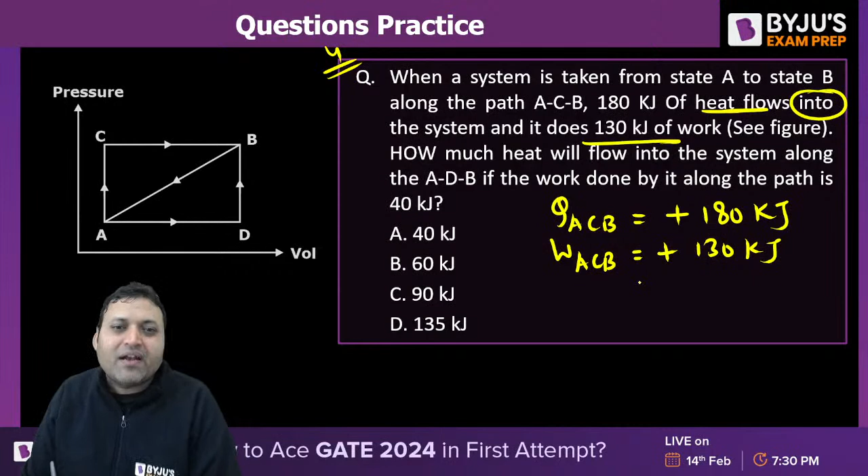Signs are important, sign convention is very, very important. How much heat will flow into the system along the path ADB, QADB, if the work done along the path is 40 kilojoule.

WADB is, what is the answer? WADB is given as plus 40 kilojoule. Yes, what is the answer? Everyone, please give it a try and let me know.

If we apply the first law of thermodynamics, we can say Q is equal to delta U plus W. Can you solve it? So Q minus W, because delta U will be same - delta U for both processes, the initial point is A and the final point is B. Because the initial and final points are same, internal energy is a property, or internal energy is a point function.

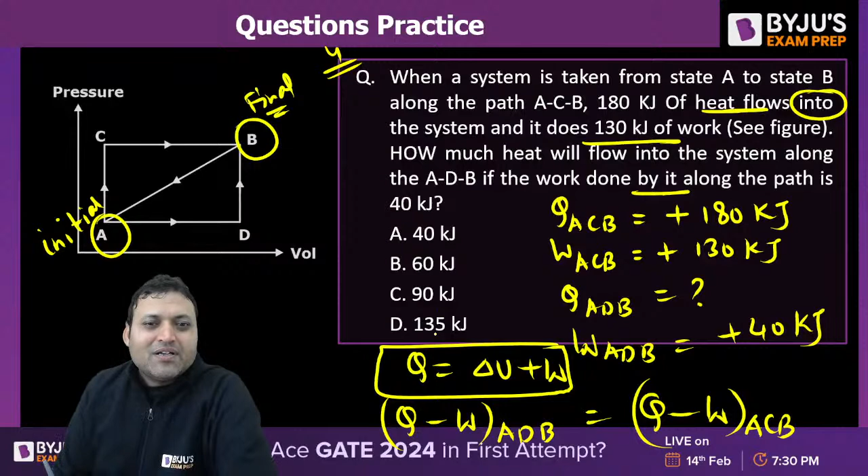So Q minus W for ADB should be equal to Q minus W for ACB. So can you find out QADB? What is the answer? If the question asks you to find the change in internal energy, that is also possible. Option C is the right answer, 90 kilojoule.

Shall I solve it? So QADB minus WADB, that is minus 40, is equal to QACB, that is 180, minus WACB, that is 130. So QADB will be equal to 50 plus 40 kilojoule, that is 90 kilojoule, right? It is 90 kilojoule. Option C is the correct answer.

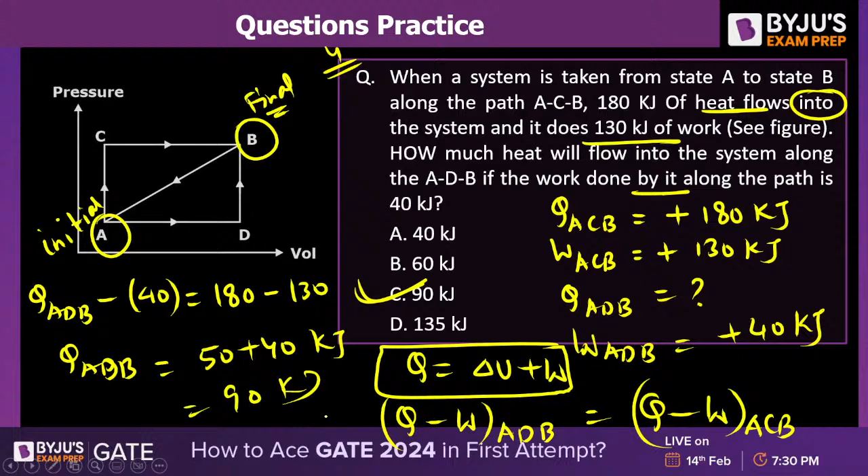Read the question and try to find out the answer. You should always read the question very carefully, because you might commit a silly mistake in a hurry.

A gas expands from pressure P1 to pressure P2, so there is an expansion of the gas. If we draw the process on a PV diagram, then it is an expansion process. P2 is P1 by 10. Let me call this P1 and this P2, which equals P1 by 10. So the gas is expanding.

If the process of expansion is isothermal, the volume at the end of expansion is 0.55 meter cube. If the process of expansion is adiabatic, the volume at the end of expansion will be close to what? So this is point 1. Can you draw the curve for isothermal?

So the slope dP by dV for isothermal is less than the slope for adiabatic. The slope of the isothermal curve on the PV diagram will be less than the slope of the adiabatic curve, isn't it? So the isothermal process will be something like this, T equals constant, and the adiabatic process will be something like this.

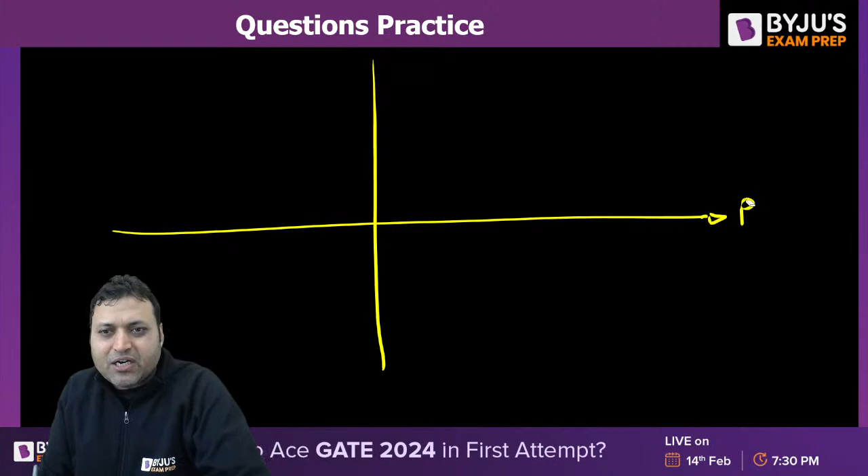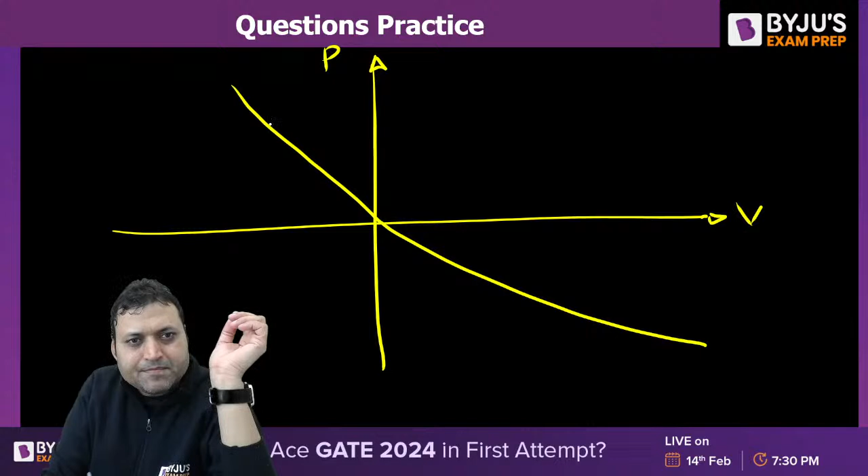Simple question. So if we draw the curve, pressure versus volume, this is constant pressure, this is constant volume line. This is volume, this is the pressure. So the curves will be something like this, this is constant temperature, isothermal, and for isothermal PV to the power n equals constant.

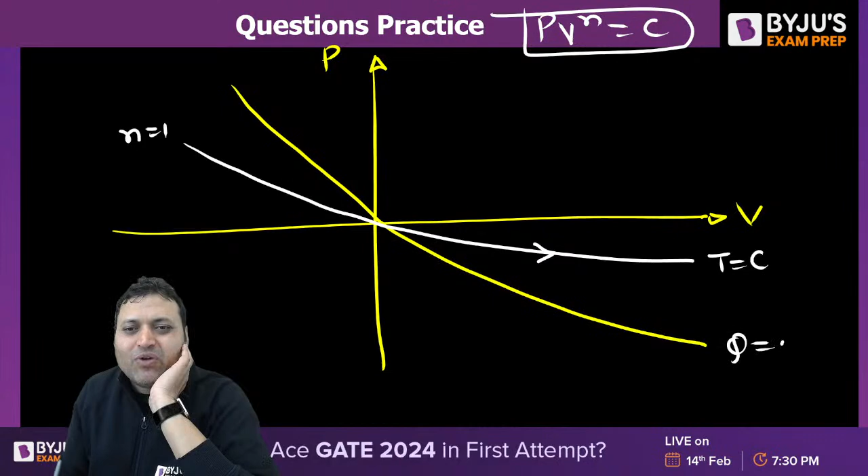For isothermal, n will equal 1, and this is adiabatic, Q is equal to 0. For adiabatic process, n equals gamma, that is Cp by Cv. And this is the constant volume process, n equals 0. For constant volume, n will equal 0. And for constant pressure, n equals infinite.

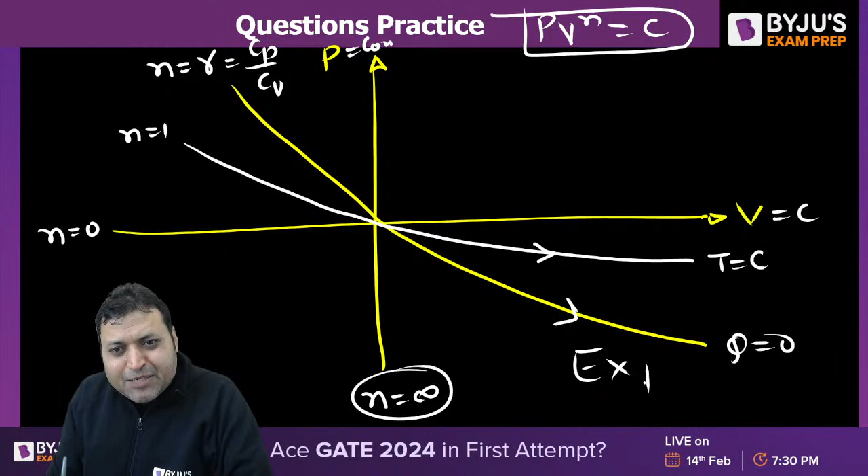This represents expansion, and this is the compression region. This will be the compression and this will be the expansion. So we can find it out.

For constant volume, n equals 0. For adiabatic, n equals Cp by Cv, so A2, C cannot be true. Isothermal, n equals 1, so B3, D is ruled out. Then constant pressure, n equals infinite, so C1, constant pressure.

I made a mistake there. For constant pressure, n will equal 0, and for constant volume, n will be infinite. This is actually the constant volume process. The vertical line is the constant volume process, and the horizontal line is the constant pressure process. N equals infinite.

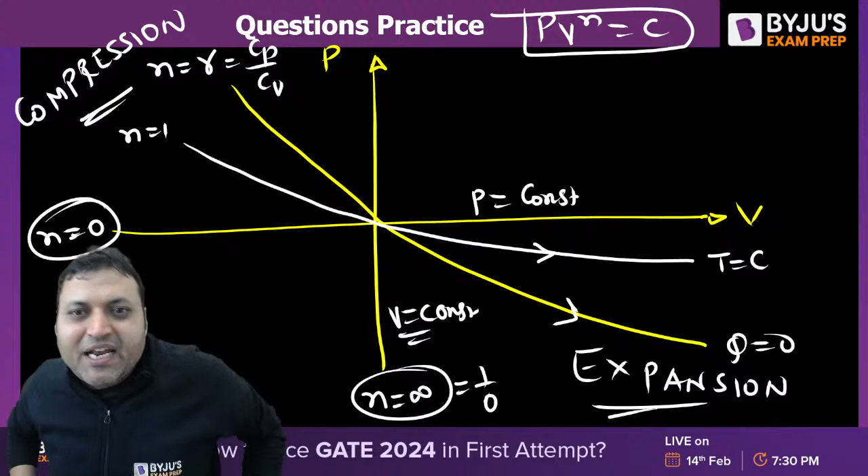Agar PV n ki value 0 put kar de toh v to the power 0 will be equal to 1. What is the value of v to the power 0, that is equal to 1? Implies pressure is constant. So for constant pressure process, n will be 0.

For constant pressure process, n will be equal to 0. And...

PV to the power n is equal to constant. If we want constant volume process, then what we can do? We can take the power 1 by n here, 1 by n. So p to the power 1 by n into v is equal to constant to the power 1 by n.

Is again another constant. So we want 1 by n to be 0 for constant volume process. So 1 by n will be equal to 0.

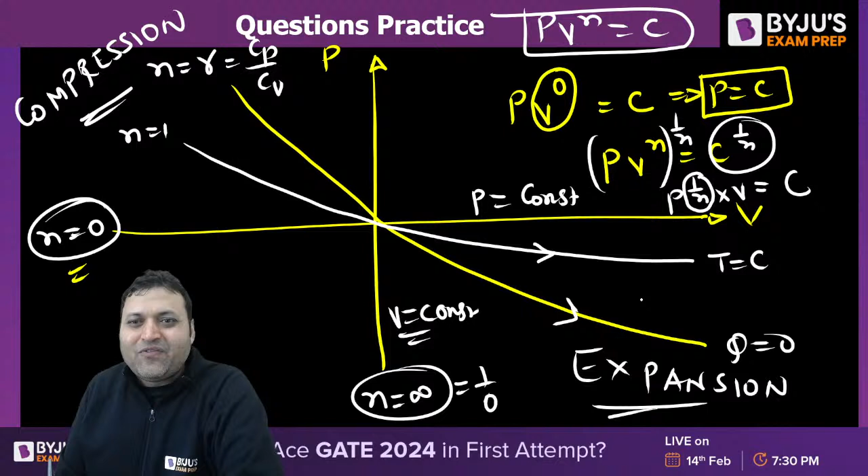So we can say n will be equal to, if 1 by n is equal to 0, then it will become constant volume process. For constant volume process, n will be infinite, isn't it?

Isothermal ke liye, isothermal process is PV is equal to constant, that is isothermal process. For isothermal process, n is equal to 1. And for adiabatic, PV to the power gamma is constant. So n will be equal to gamma, that is Cp by Cv. Right, Krishna? Clear?

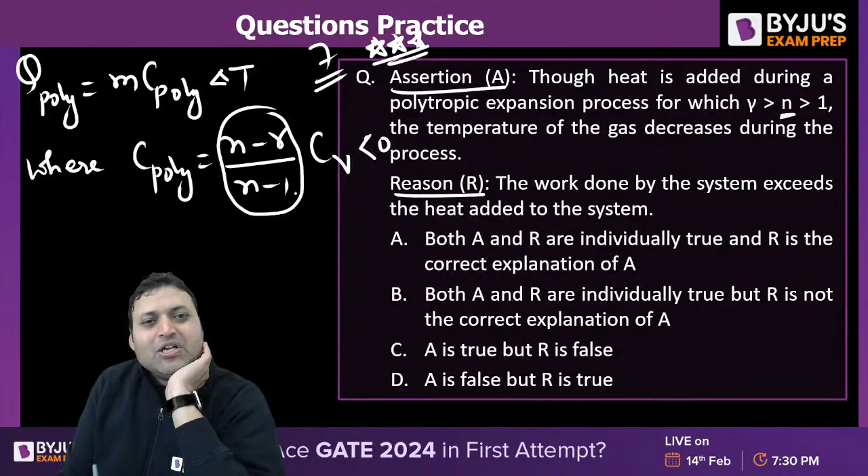So if you see, this is less than 0, this is negative because n is less than gamma. So n minus gamma will be negative. So this value will be negative. So if Q is positive, heat is added, then delta T will be negative.

So the temperature will decrease. Heat addition will give rise to decrease in temperature, and heat rejection will give rise to increase in temperature. For a polytropic process, heat addition will give rise to decrease in temperature, and heat rejection will give rise to

increase in temperature. So the temperature of the gas will decrease during the process, heat addition. So assertion is correct.

And if we talk about the reason, the work done by the system exceeds the heat added to the system. If we talk about the work done, what is the work done in a polytropic process?

Or we can say Q for polytropic process is equal to M into C poly into delta T, which is equal to gamma minus n upon gamma minus 1 into W for polytropic process.

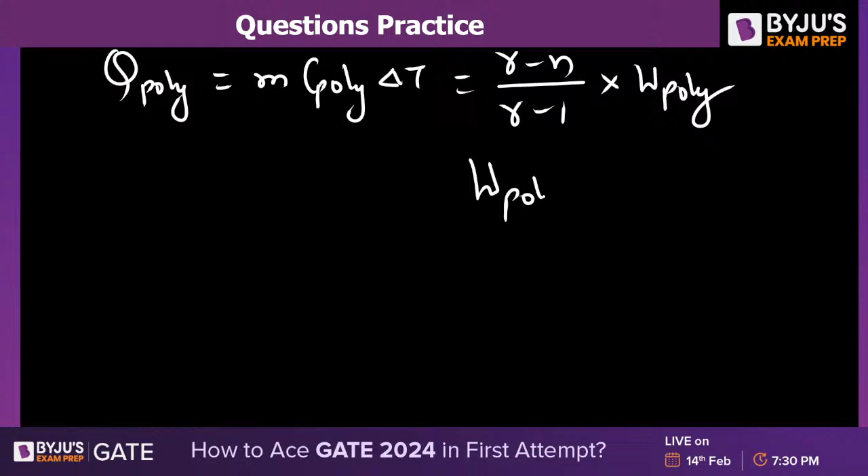And where W for polytropic process will be equal to P1 V1 minus P2 V2. It will be P1 V1 minus P2 V2 upon n minus 1. Right?

So this is positive value, this is positive. And that is less than, this is less than 1.

That is less than 1. So if this is less than 1, then Q poly will be less than W poly.

The work done by the system, reason, sorry. So work done.

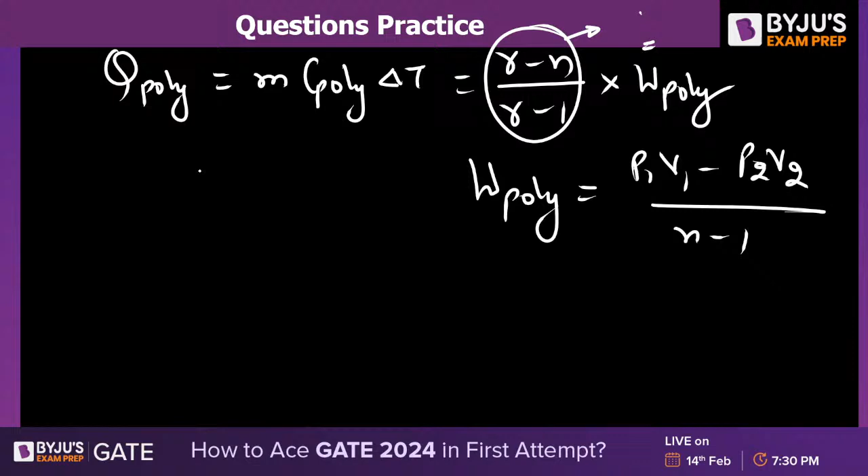Because gamma is greater than n is greater than 1, the work done by the system exceeds the heat added to the system.

Yes, work done is greater than, because Q is equal to W plus delta U, because the temperature is decreasing, so this is decreasing.

Delta U will be decreasing. So that is why work done is greater than Q, heat supply. Yes, so option A is the correct answer.

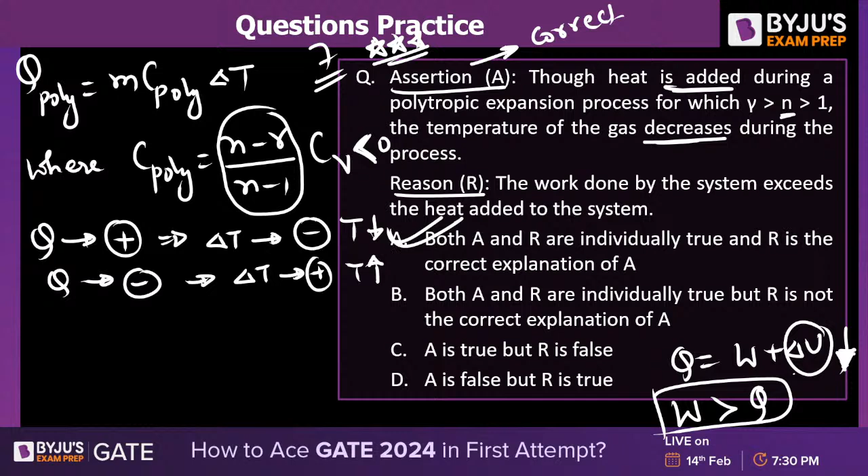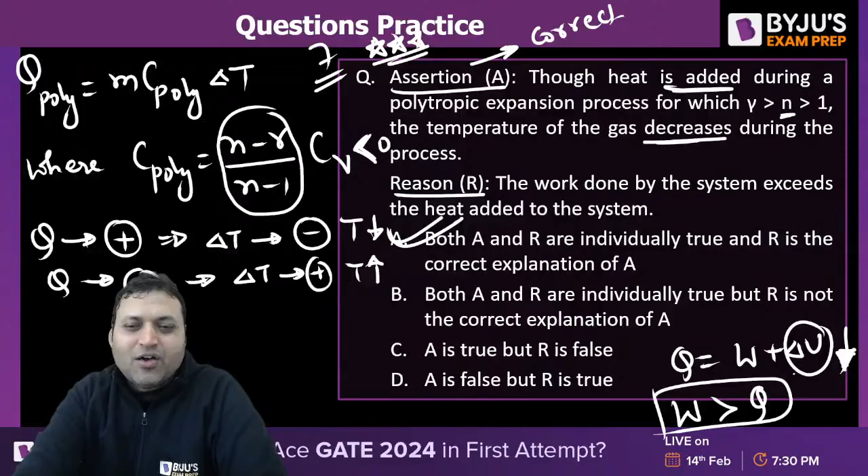Assertion and reason are individually true, and the reason is the correct explanation for the assertion. That is why during the heat addition, the temperature decreases. So option A is the right answer, option A will be the correct answer.

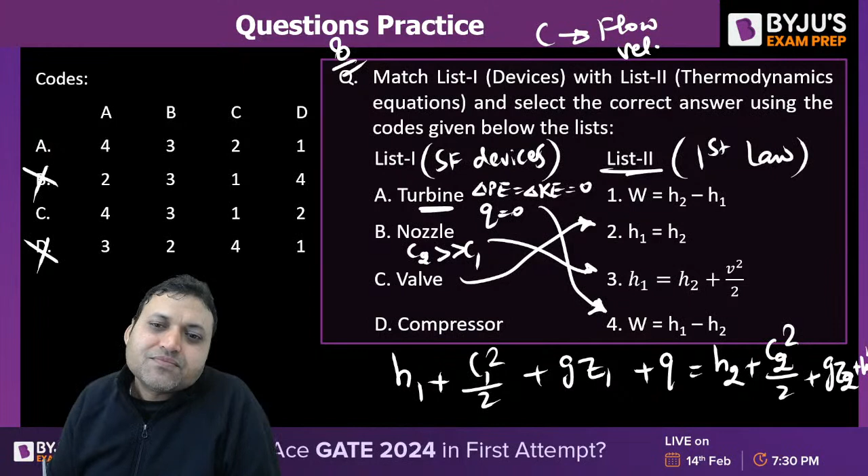And valve: isenthalpic, throttling valve is isenthalpic. Throttle valve, isenthalpic, there is no change in potential energy, no change in kinetic energy, no heat flow, no work done. So for a valve, H1 is equal to H2, C2, C2. Option A is the correct answer.

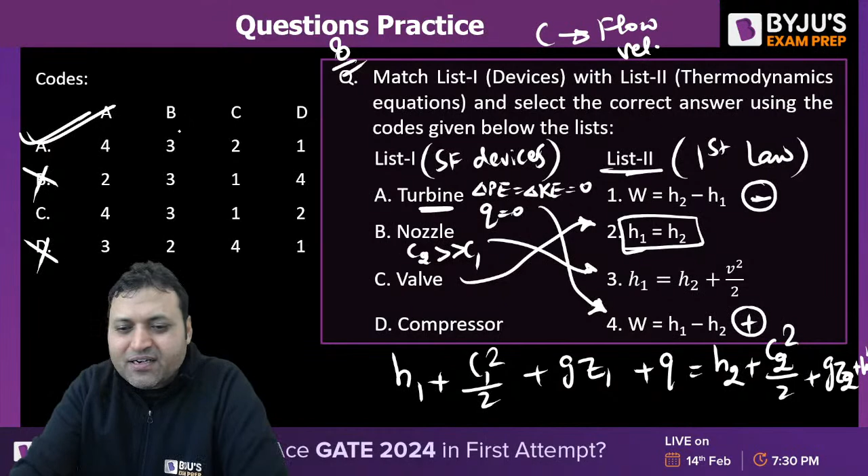And D, compressor is a work consuming device, so it will be H1 minus H2. Work done for a compressor is negative, work done for a turbine will be positive. Sorry, this is for turbine and this is for compressor: 1 is for compressor, H2 minus H1, and 4 is for turbine. Option A is the correct answer, right? Option A.

The next one, question number 9. Question number 9 is this. Can you solve this one? Question number 9 on the screen.

It is a PV curve. The net work done for a closed system undergoing a cycle shown in the figure, pressure versus volume diagram, is what is asked. What is the net work done for the cycle A, B, C, D? Can you solve it? This is question number 9, we are having 20 questions, then Sonu sir will bring another 20 questions.

For a cycle, the work done is the area under the PV curve or area enclosed by the cycle. Net work done will be the area enclosed by the cycle. Can you find out the area? Pressure is in bar, volume is in meter cube, so bar is 100 kilopascal.

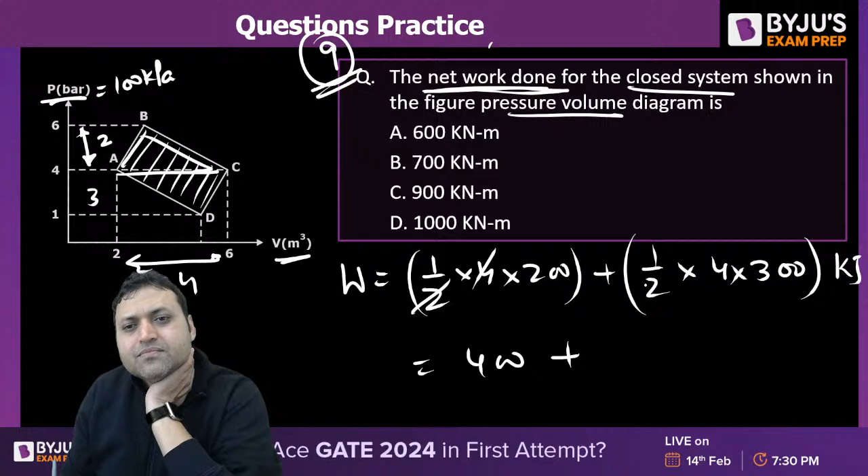So if you see, the height of triangle ABC is 2 and the height of triangle ACD is 3. So work done is equal to half into base, this base is 4 meter cube, into height that is 200 kilopascal, plus half into base, again 4, into 300 kilopascal. This is in kilojoule or kilonewton meter. Do the calculation, that is equal to 400 plus 600, that is 1000 kilonewton meter.

Option D is the answer, 1000, yes it is option D.

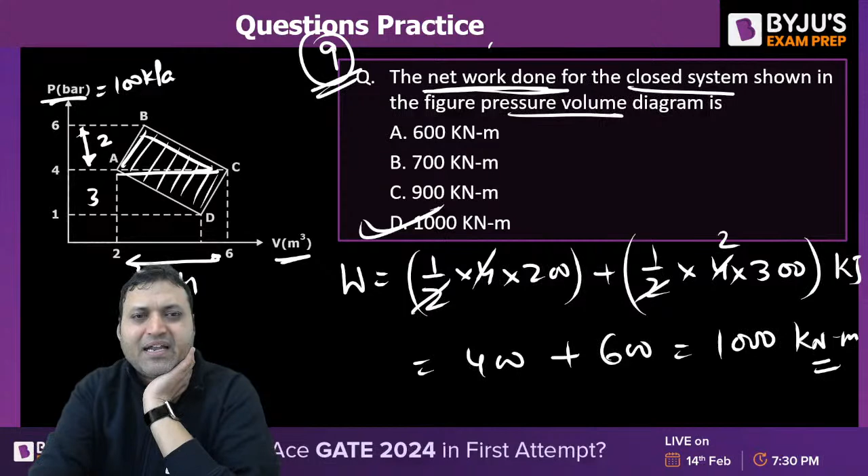The next one, question number 10. There is a volume versus temperature curve given for the cycle. You need to represent this curve on a PV diagram, represent this cycle on the PV diagram.

If you see the AB process, A to B, volume is directly proportional to temperature, it is a straight line. So AB is a constant pressure process. This cannot be correct if it's shown as constant volume, AB is constant pressure process. If volume is directly proportional to temperature for an ideal gas, then it means it is an isobaric process. Only option possible is D.

AB is constant pressure, heat addition, so the temperature is rising. Heat addition at constant pressure is constant pressure expansion, so there is an expansion.

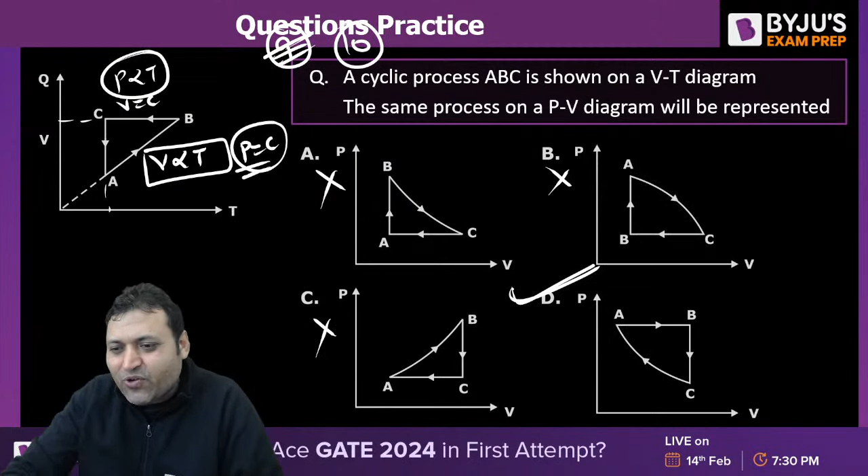B to C is a constant volume process, so pressure is directly proportional to temperature. B to C is constant volume process. And C to A is constant temperature or isothermal process, C to A is isothermal. D is the answer for this, option D is the correct answer.

You should be able to represent a cycle on one curve into another curve. The next question, question number 11.

The next one, question number 11. If integration of PdV and integration of VdP for a thermodynamic system of an ideal gas on evaluation give the same quantity during a process, then the process undergone by the system is?

So for which curve? For an isothermal process, closed system work will be equal to open system work. Integration of PdV will be same as integration of VdP, or minus VdP. So closed system work and open system work will be the same.

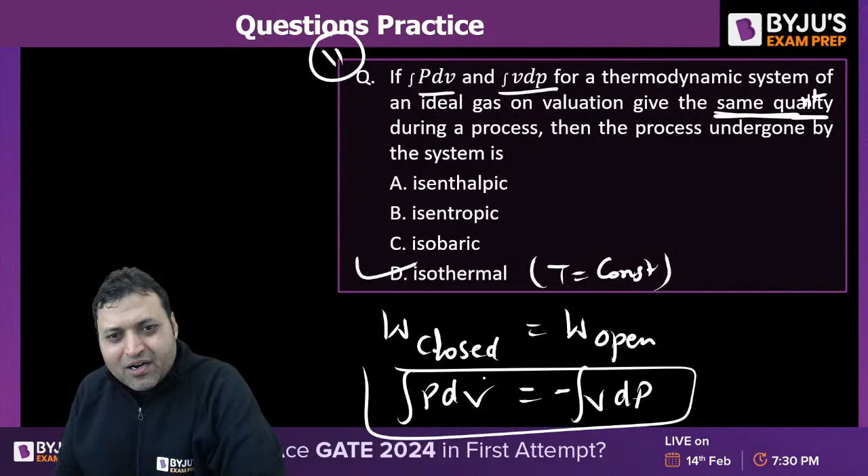First law of thermodynamics is valid for the next one. First law of thermodynamics is valid for.

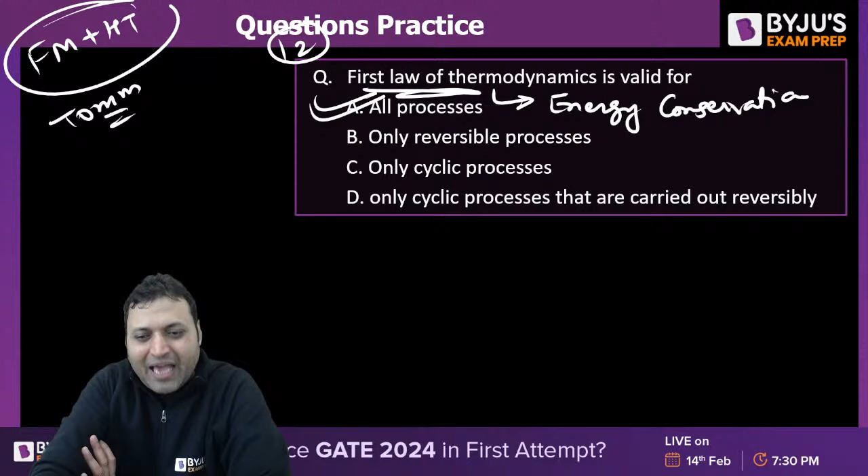First law of thermodynamics is nothing but energy conservation. It is energy conservation, so it is valid for all types of processes, reversible as well as irreversible. It is valid for a process also, and it is valid for a cycle also, because it is the energy conservation which is a universal law.

The next question, question number 13. Beautiful question. An ideal gas is taken through 3 processes, as a result of which the final state is identical with the initial state. It means it makes a thermodynamic cycle. The nature of the processes, work done and heat transfer during the processes are as follows.

1 to 2 is a constant volume process, volume is constant, with a heat input of 50 kilojoule. Q is equal to 50 kilojoule, heat is added. And if it is constant volume, work will be equal to 0, W equals 0, and Q is equal to delta U.

Then 2 to 3 process is isothermal, temperature is constant. Isothermal expansion, and the work done by the system is 500 kilojoule. Here delta U will be equal to 0. So W is equal to Q, work done is equal to heat addition.

And 3 to 1 process is constant pressure, pressure is constant for 3 to 1. And the work done on the system, W is equal to minus 200 kilojoule. Then what will be the heat transfer and the change in internal energy during the process 3 to 1? So what is Q for 3 to 1 and change in internal energy from 3 to 1? What is the answer?

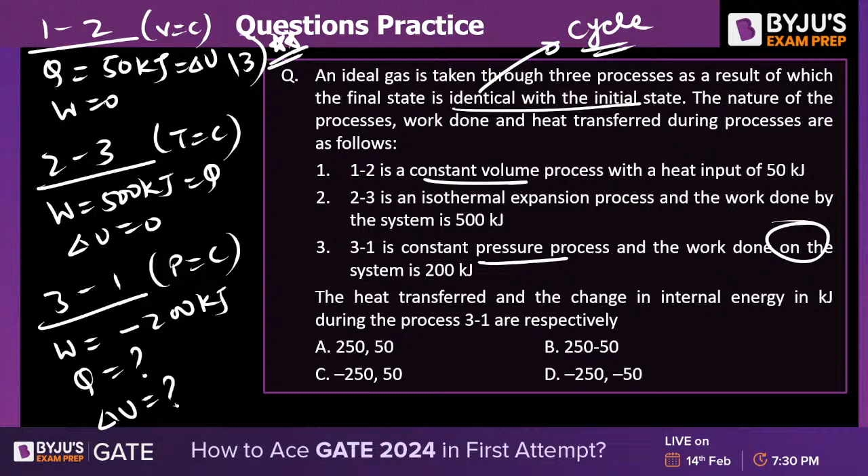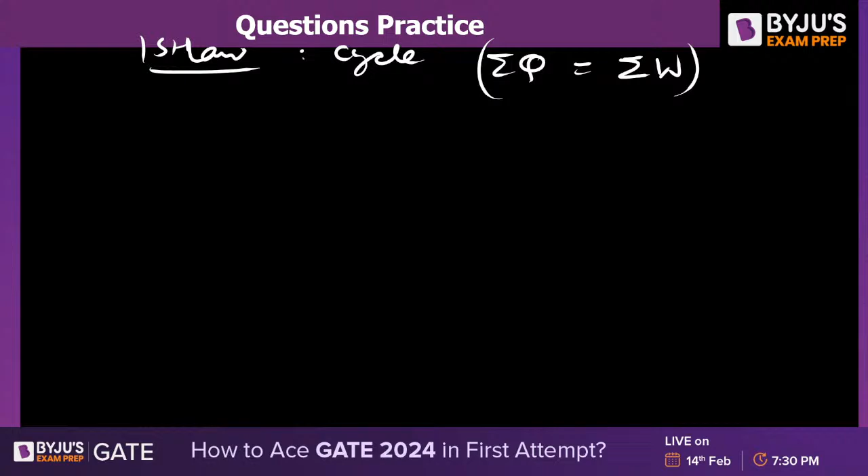So for a thermodynamic cycle, net heat transfer is equal to net work transfer - first law for a cycle. If we apply first law for a cycle, sigma Q is equal to sigma W. From here we can find out W. Can you find out W?

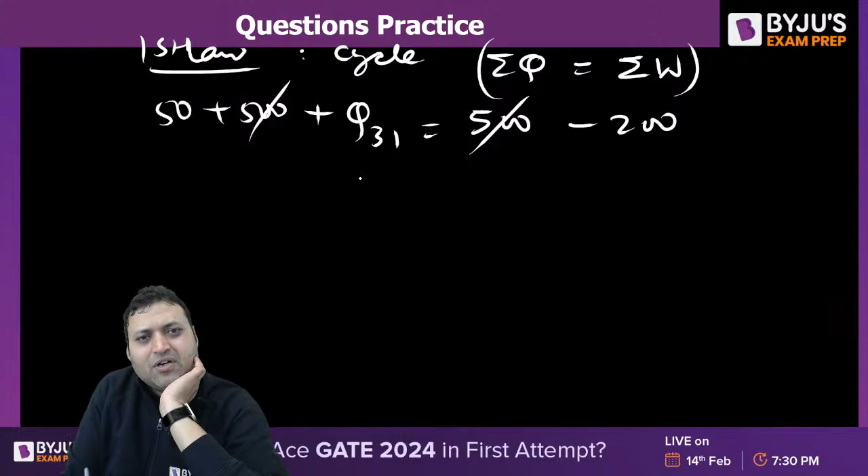50 plus 500 plus Q for 3 to 1 is equal to 0 plus 500 minus 200. This 500 gets cancelled out. So Q for 3 to 1 is equal to minus 250. Once you find Q for 3 to 1, you can find delta U. So Q for 3 to 1 is equal to delta U for 3 to 1 plus W for 3 to 1. So minus 250 is equal to delta U plus W 3 to 1 which is minus 200. So delta U will be equal to minus 250 plus 200, that is equal to minus 50.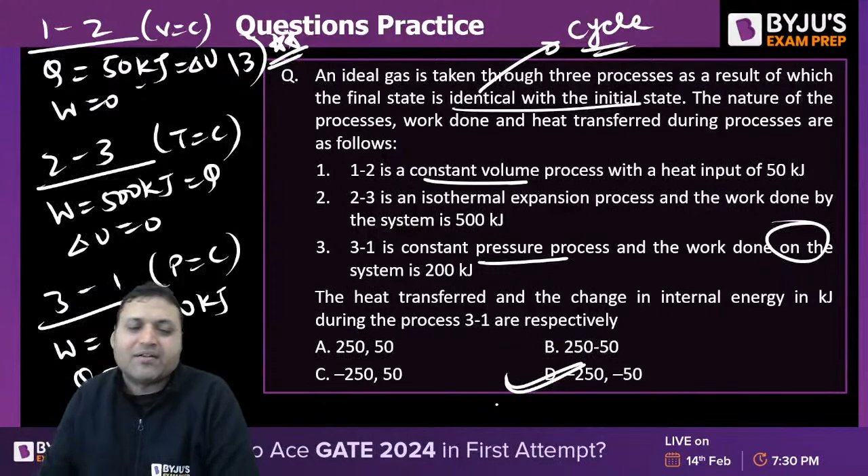First law of thermodynamics: so Q will be minus 250 and delta U will be minus 50. Minus 250 and minus 50. Signs are very, very important - take care of the sign convention, otherwise you might end up committing a mistake.

The next one, question number 14. Question number 14 on the screen. Find out the answer for question number 14.

A balloon containing an ideal gas is initially kept in an evacuated and insulated room. Q is equal to 0, thermally insulated, and evacuated means free expansion. It is vacuum - vacuum does not offer any resistance. It is the free expansion, so W is equal to 0.

The balloon ruptures and the gas fills the entire room. Which one of the following statements is true at the end of the above process? So it is the free expansion against vacuum, which does not offer any resistance, so work done will be equal to 0. Q is equal to 0, and from the first law of thermodynamics, delta U will be equal to 0. And because it is an ideal gas, U and H are a function of temperature only.

For an ideal gas, U and H are functions of temperature only. So if delta U is equal to 0, it means the temperature is constant. Then delta H will also be equal to 0. Both internal energy and enthalpy change will be 0, meaning both will remain constant. There is no change in internal energy and no change in enthalpy of the system.

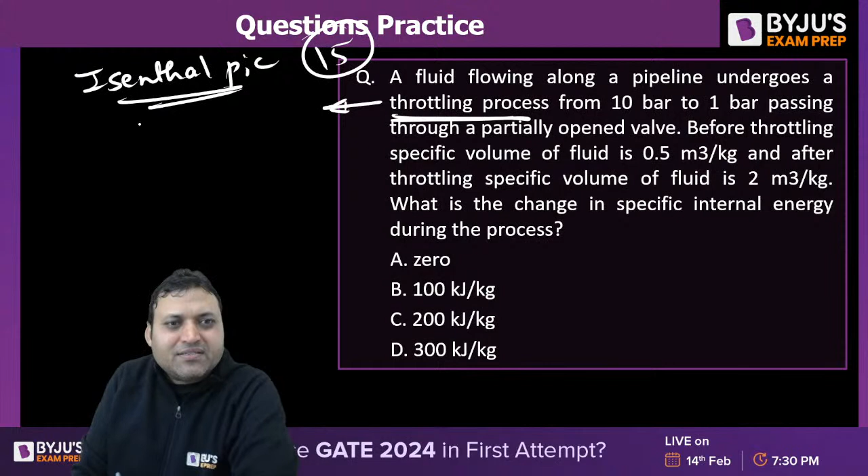Question number 15. A fluid flowing along a pipeline undergoes a throttling process. What is throttling? Flow through a restricted passage, and throttling is isenthalpic, so H1 is equal to H2. Enthalpy remains constant. It is expanding, flowing from 10 bar to 1 bar, passing through a partially opened valve. Before throttling, specific volume is 0.5 meter cube per kg, and after throttling, specific volume is 2 meter cube per kg. What is the change in specific internal energy?

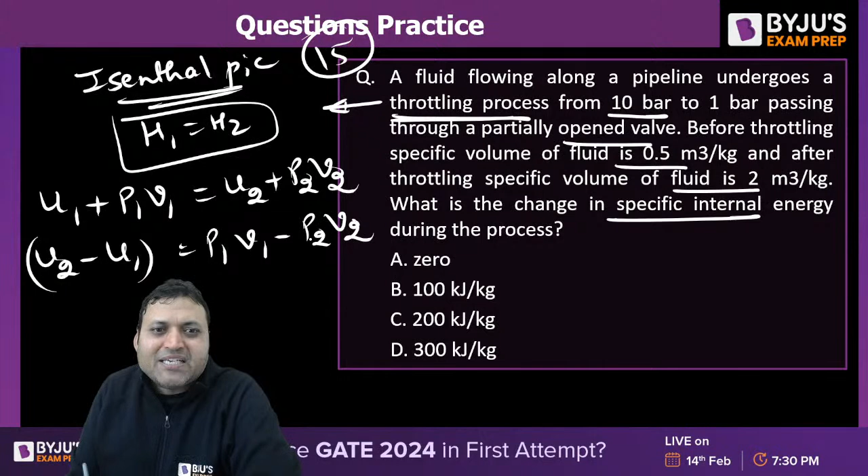So U1 plus P1V1 is equal to U2 plus P2V2, where P is pressure and V is specific volume. So U2 minus U1 is equal to P1V1 minus P2V2. We need to find the value in kilojoule per kg. P1 is 10 bar, V1 is 0.5, minus P2 which is 1 bar, that is 100 kilopascal, into V2, that is 2. That will give you the answer.

500 minus 200, that is 300 kilojoule per kg. Right, 300 kilojoule per kg. Option D is the correct answer.

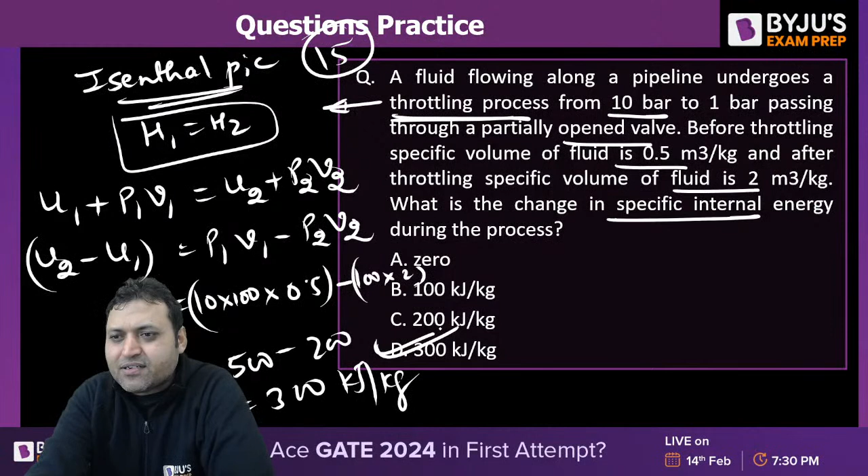Question number 16. An engine, heat engine, reversibly receives 1200 joule of heat at 900 Kelvin. It is receiving 1200 joule of heat. After rejecting heat to the ambient at 300 Kelvin, it develops 600 joule of work. Work produced is equal to 600, so Q2 will be equal to 600.

From the second law of thermodynamics, the irreversibility in joule is equal to T naught, the ambient temperature, into delta S for the universe. There is no change in entropy for the engine itself, so universe means source and sink, treated as an isolated system. So T naught is 300. We can say delta S for the source plus delta S for the sink.

300 Kelvin multiplied by: heat is rejected from the source, so entropy will decrease, that is minus Q1 by T1. Heat is added to the sink, so entropy will increase, that is plus Q2 by T2. Put the values and you get: 300 into minus 1200 divided by 900, plus 600 by 300.

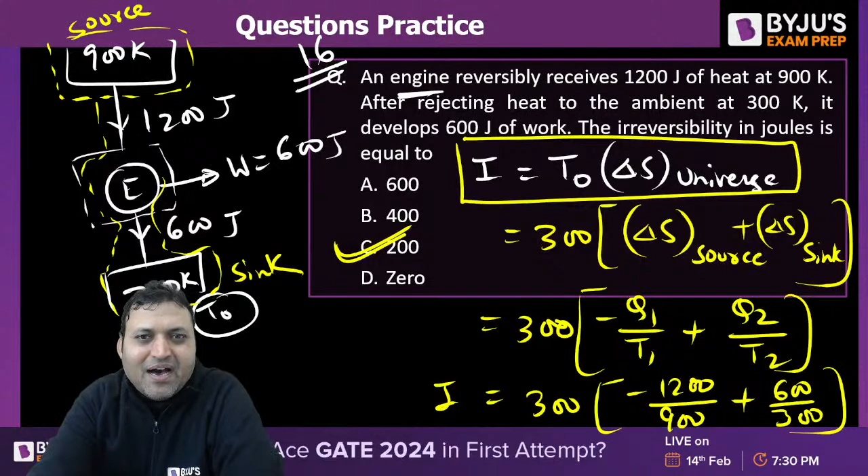What is the answer for question number 16? Irreversibility is equal to this formula, which you are supposed to remember. So the answer to this question is option C.

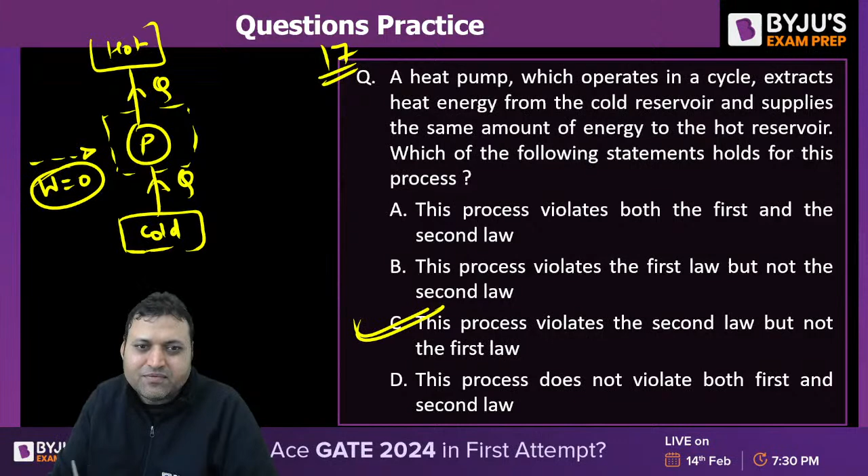According to the first law of thermodynamics, energy in is equal to energy out, so it does not violate this law. But it violates the Clausius statement of the second law of thermodynamics, because according to Clausius, heat cannot flow from a low temperature reservoir to a high temperature reservoir without any external work. So if work done is zero, the process cannot be possible. This process violates the second law but not the first law. Option C is the correct answer.

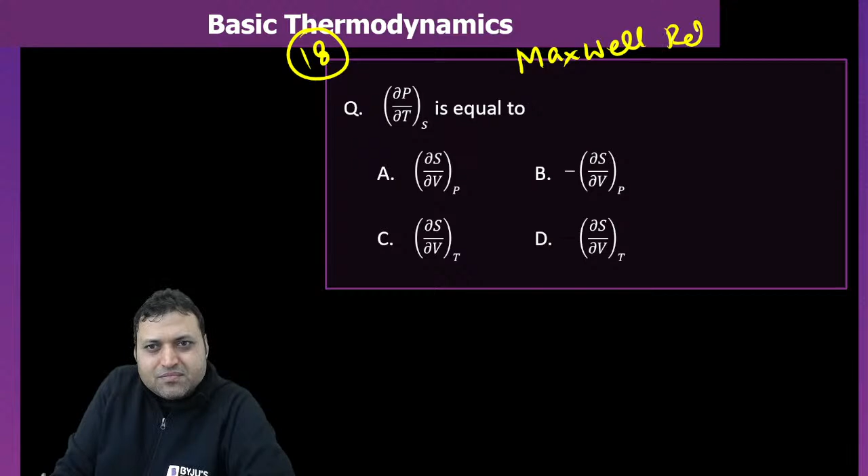Question number 18. From the Maxwell relation, you can develop the relation using the thermodynamic square. Del P by del T at constant entropy is equal to which one of the following options? Using the thermodynamic square, you can memorize this. I hope you know the thermodynamic square.

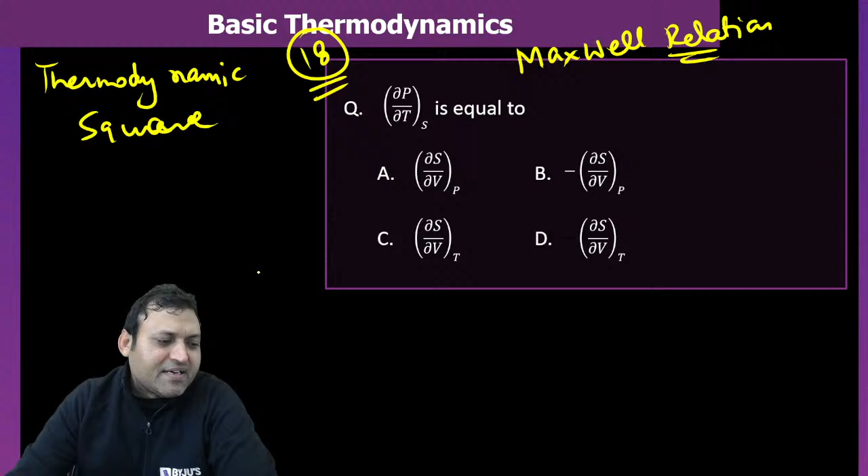Good professors have studied under very fine teachers. So del P by del T, this is equal to, at constant... del P by del T. It must have been.

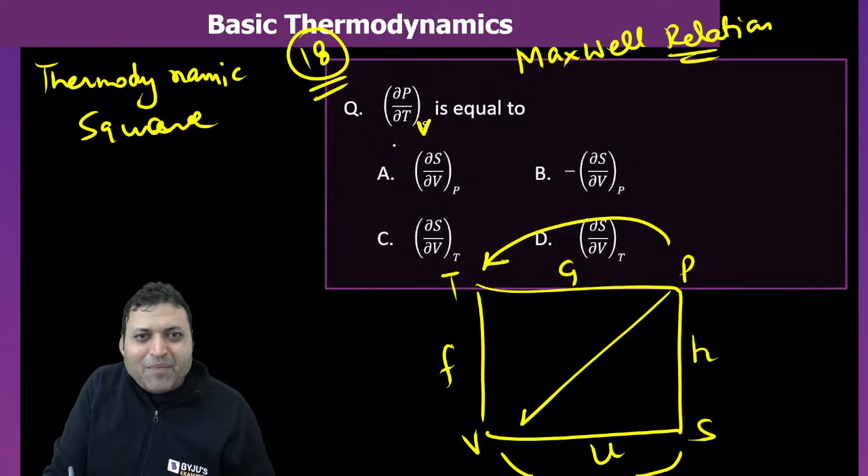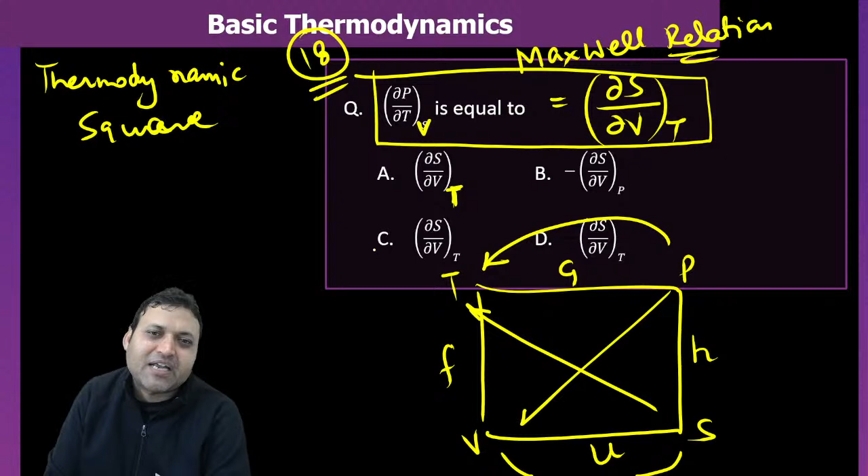It should have been constant volume, then it will be del S by del V at constant pressure. There was a slight mistake here. C and D are same. Del P by del T at constant volume should be equal to del S by del V at constant temperature. It should have been the temperature. And when S and P are coming together, we should put negative signs. So there was a slight mistake in the options, but del P by del T at constant volume should be equal to del S by del V at constant temperature. Option A would have been correct.

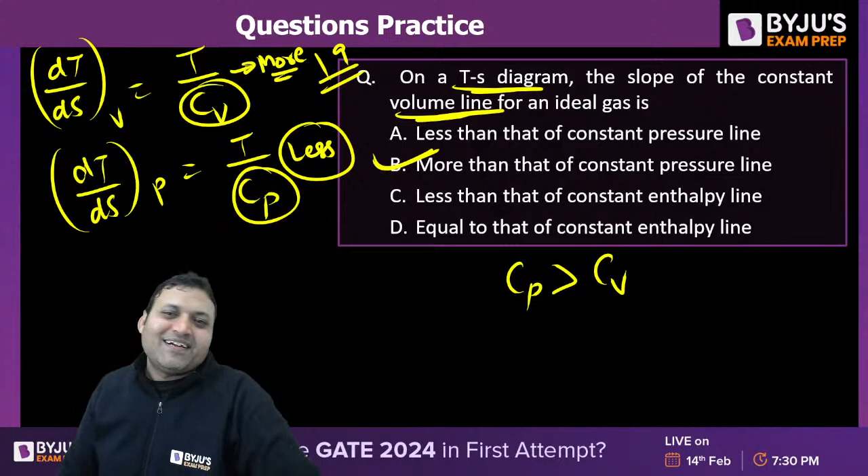Next one, question number 19. On a TS curve, the slope of constant volume line for an ideal gas is. So for a constant volume line, slope dt by ds is equal to T by Cv. dt by ds for constant pressure is equal to T by Cp. And Cp is greater than Cv, so constant volume line will have more slope than the constant pressure line, because Cv is less. Isn't it option B? Constant volume line will have more slope. It is B.

And this question is your assignment. This is your assignment question.

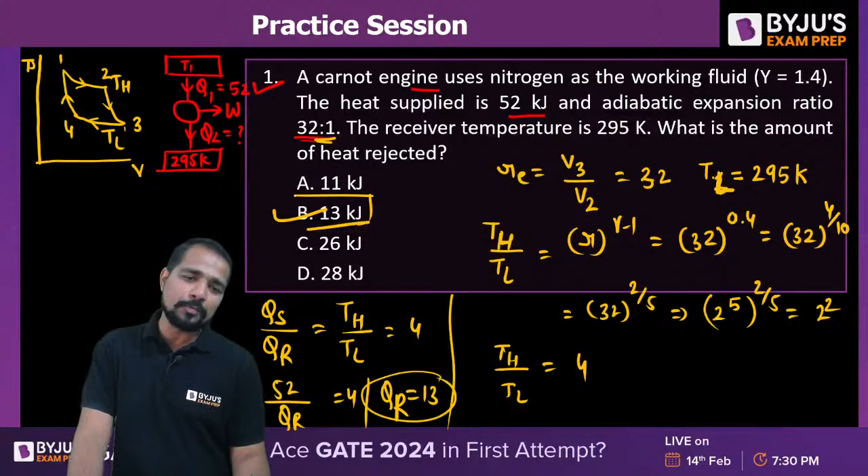Again, it is the example of the Carnot engine. You may ask why it is the Carnot engine. This is T1, this one is the heat supply, and this is the heat engine. And again there is the heat rejection, and this will be T lower, that will be the value of T2. Work will be somewhere like this.

You must ask, sir, nowhere is it written that it will be a Carnot cycle, so how can we say that? Sir, it is written clearly that you want to reject the least amount of heat, meaning you want the maximum amount of work output, and that is only possible when it is the problem of a reversible heat engine or the Carnot cycle.

So can we write from here that efficiency of the Carnot engine will be equal to 1 minus T2 divided by T1? It is also equal to 1 minus Q2 divided by Q1. So in this case, T2 divided by T1 will be equal to Q2 divided by Q1. T2, how much is given, my dear? T1 is 606. What will be the value?

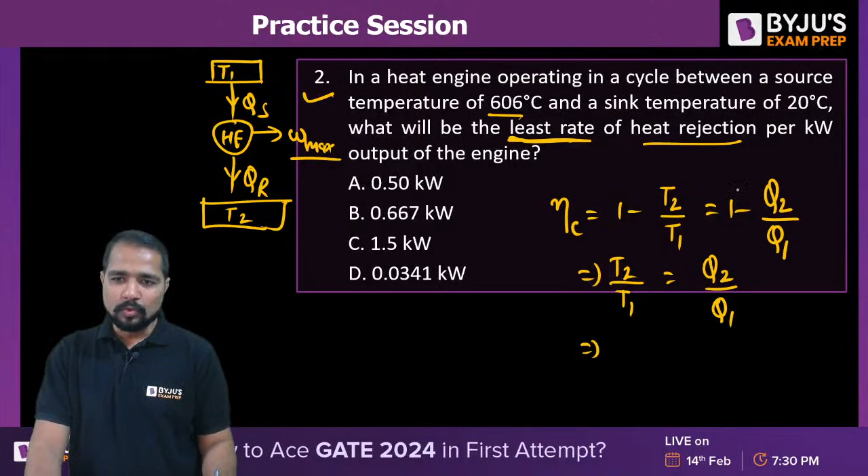T2, 20, that is 293. And what is it? That will be equal to 879. Absolutely right. And this is Q3 or Q2, and that is Q1. Are we not getting 1 by 3? 1 by 3, so what is the, yes, so in this case we can say that Q2.

Q2 will be equal to Q1 by 3, right? So for 1 kilowatt, if we write from here, then we can write W will be equal to Q1 minus of Q2. And W, what exactly I want? 1 kilowatt. So what is the value of Q2 we need to find?

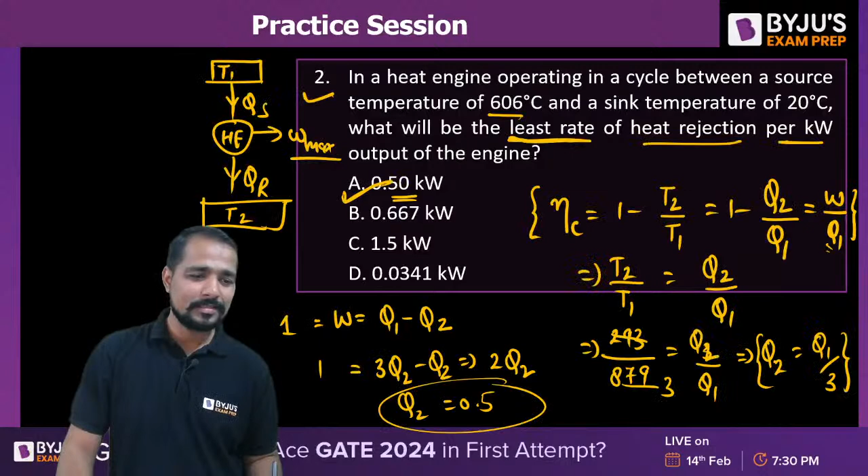What's happening to the screen? Okay, now it's fine. Yes, so the next question is this one.

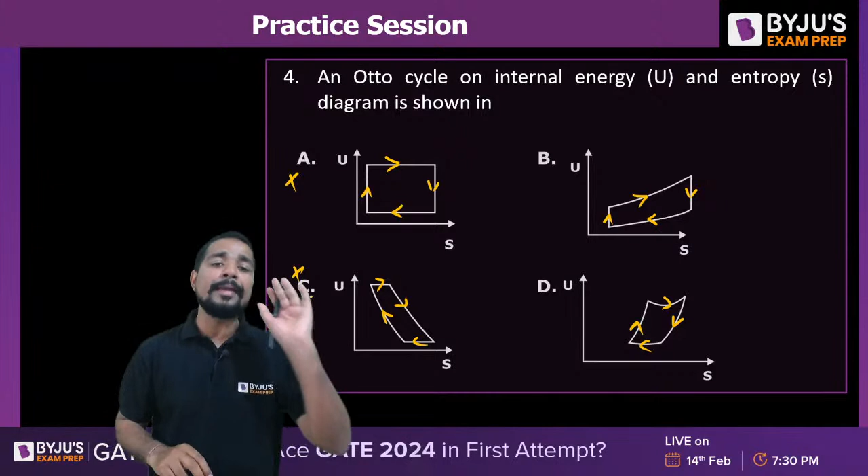Let me tell you, my dear, 1A and C will never be the answer to this Otto cycle question. Why? Because in 1A and C it is clearly given. No, this might look like Carnot cycle to you, but in Carnot cycle we make the temperature-entropy diagram. Here we are talking about internal energy and entropy. So 1A and C will never be the answer.

Do you know why? Because in A and C it is clearly mentioned that internal energy remains constant, which is impossible in Otto cycle, because internal energy is a function of temperature, and temperature can never be constant. So A and C is absolutely the wrong option.

Let's come to this part. One process is the isentropic process, entropy remains constant. Yes, it is valid - expansion and compression process are isentropic. So B is the right answer. Even in option D, entropy does not remain constant, that is why it is also an incorrect option. So B is the correct answer.

Next, in order to get the value of thermal efficiency of Otto, diesel and dual cycle when they have equal compression ratio - the point is very clear. In Otto cycle we know that 2 are isochoric processes and the other 2 are adiabatic processes, and in adiabatic process entropy remains constant. So first we must know that this and this will never be the process, because in both processes entropy is not constant in at least 2 processes.

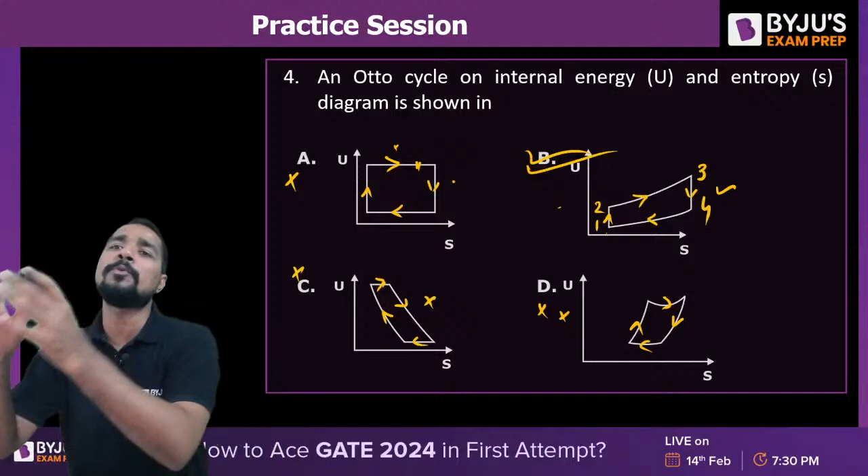Because in B both the conditions are satisfied. What is the first condition? Entropy constant in adiabatic compression and expansion. What is the second condition? Entropy constant, but internal energy can never be constant because in the entire process there is no isothermal process in Otto cycle.

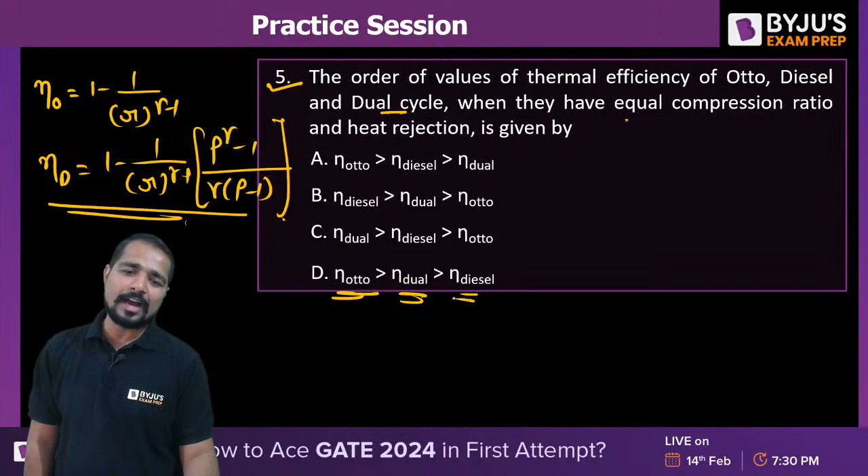Is it or not? So it is clearly given that Otto will have the maximum efficiency, then dual, then after that diesel, because the bracket term is more than 1. That's why Otto cycle for the same compression ratio will have the maximum efficiency.

Come back to question number 6. In practice, efficiency of the diesel engine is greater than the efficiency of the petrol engine - this is the assertion, and in practical condition this is true. The second statement given is, for the same compression ratio, efficiency of the diesel engine is higher than that of the Otto cycle.

We just did this part - you cannot get it wrong now. R is absolutely wrong, my dear. So there is the option where R is wrong, that is option C - yes, A is true, but R is false.

Next, a gas turbine with infinite number of compression and expansion stages - a gas turbine having infinite number of compression and expansion strokes.

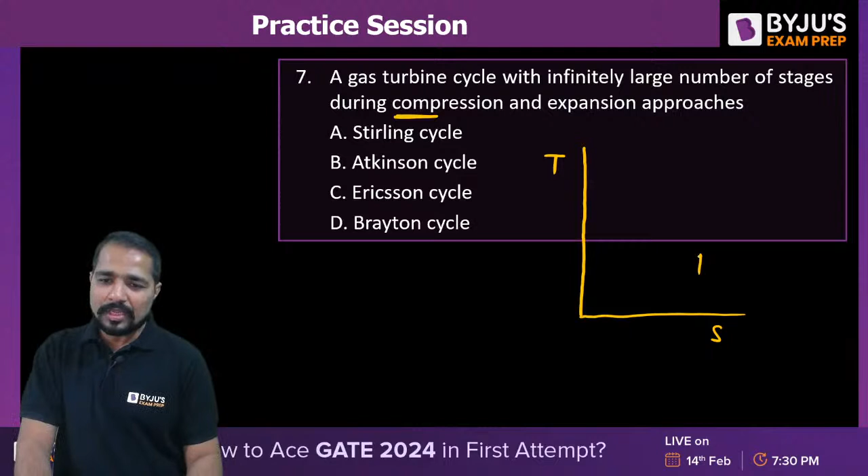So if I have infinite number of compression strokes like this, after that this one is the pressure constant, infinite number of expansion strokes like this, and after that there is the process. So when this becomes infinite, this height will start to decrease and it will be converted into a line - in this case you can say temperature is constant, when infinite number of stages will be there.

What does this mean? We are talking about a cycle which has two processes as isothermal and other two processes as isobaric, and that has one particular name - that is the Ericsson cycle.

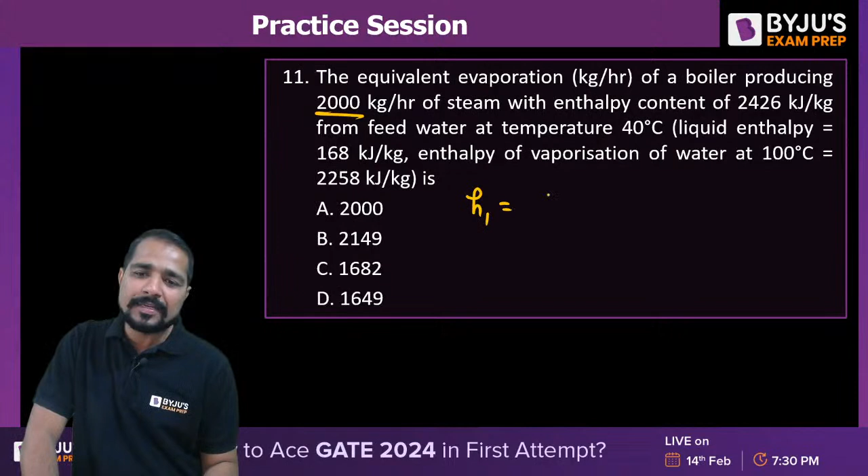From H1, how much? This is 168 kilojoule per kg. We are producing the enthalpy whose numerical value is 2426 kilojoule per kg. After that, the mass of the steam we are producing is 2000 kg per hour.

So what is the equivalent evaporation? We need to check if some formula is remembered. Equivalent evaporation is known as ME. What is the total amount of heat we need to invest to produce the enthalpy? That is H2 minus H1 divided by HFG at the atmospheric boiling point, that is 100 degree centigrade.

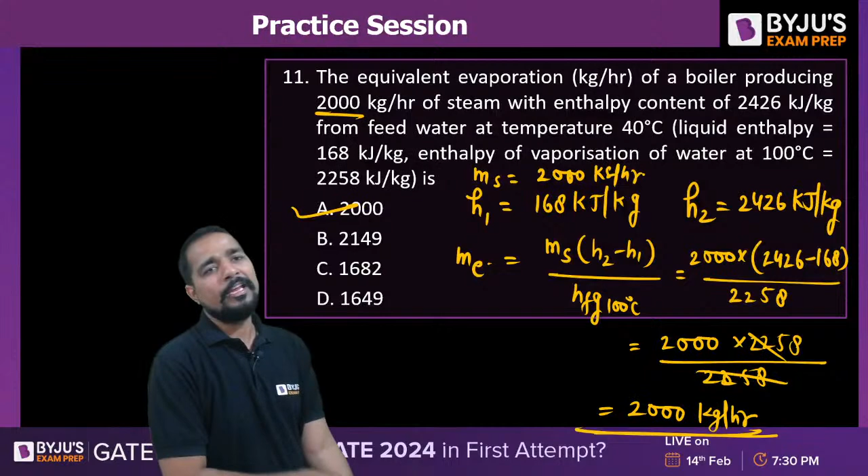So we solve it. We are getting 2000 multiplied by H is 2426 minus 168 divided by 2258. If we solve it, we are getting the answer 2000 multiplied by 2258 divided by 2258. What is the right answer? Right answer is 2000 kg per hour. A is the correct answer, A for Ahmedabad, correct for all of you.

Let's discuss this, we did a similar question yesterday also. The similar question we have discussed in the last class also.

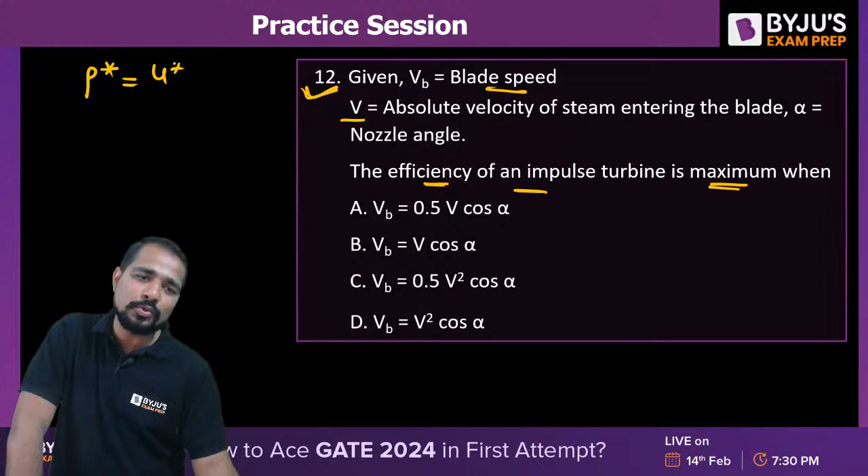Given that VB is the blade velocity and V is the absolute velocity of the steam entering the blade, or leaving from the nozzle, and alpha is the nozzle angle, then what will be the ratio of blade velocity to the nozzle velocity for maximum diagram efficiency of this impulse turbine? We have already written in the last class that rho star will be equal to U star divided by V. It will be equal to cos alpha by 2, or we can write that U star, as given in this question, will be equal to 0.5 V into cos alpha.

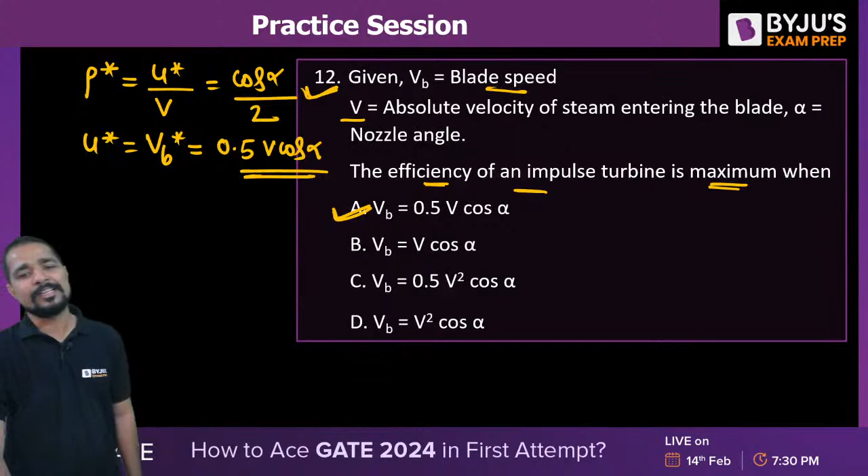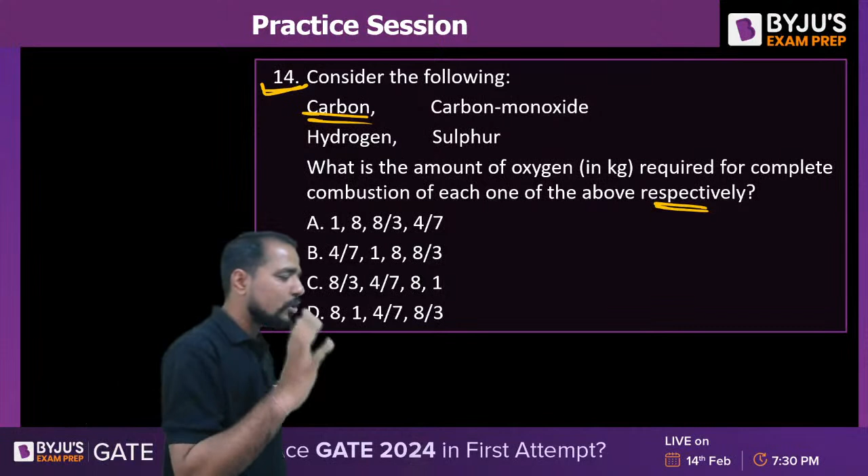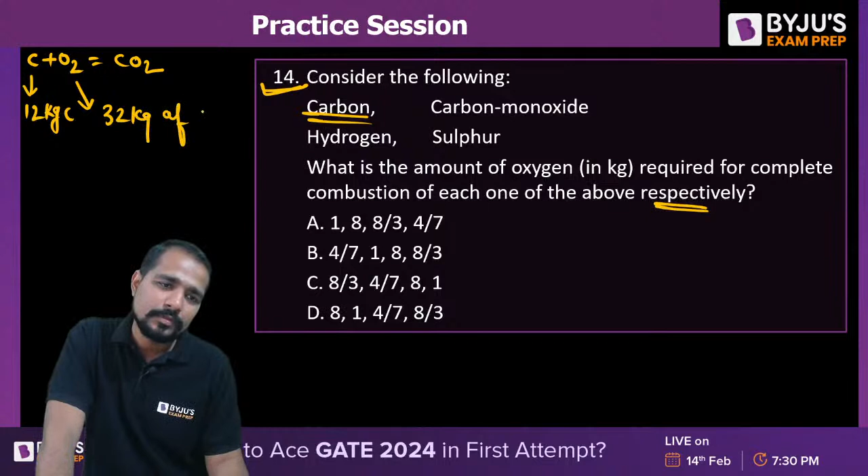Like if I take carbon plus O2, that will be CO2. How much carbon is there? Can I write 12 kg of carbon? That requires how much? 32 kg of O2. So for 1 kg of carbon, how much will be required? 32 divided by 12 kg of O2. What will be the value? 8 by 3.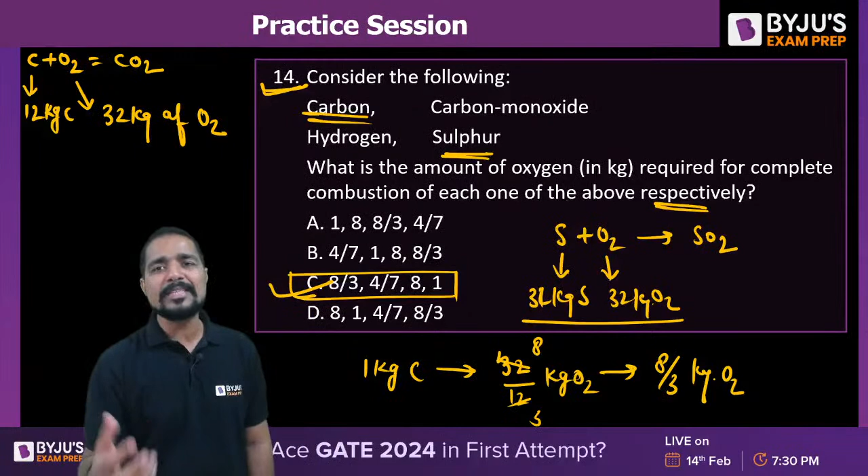Like this question has come before. Tell me - the compression ratio of the gas power plant corresponding to maximum work output.

Maximum work output - if we are talking about the TS diagram of the cycle, then this is the lower temperature and this is the higher temperature. This is maximum, this is the minimum. And you want to run a cycle somewhere like this, whose compression ratio is optimum - I mean 1 to 2, 3 to 4 is optimum. Yes, like this. So you're asked what is the value in this case.

We know very well that T3 is not involved directly here. Let me tell you, T2 is equal to T4 is equal to under root of T1 into T3. This is called, or you can also call it Tmax and Tmin. And compression ratio in this case, optimum compression ratio is given by T3 divided by T1 raised to gamma upon 2 into gamma minus 1, where T3 is equal to Tmax. These are all technically proven conditions for maximum work, we have proved this.

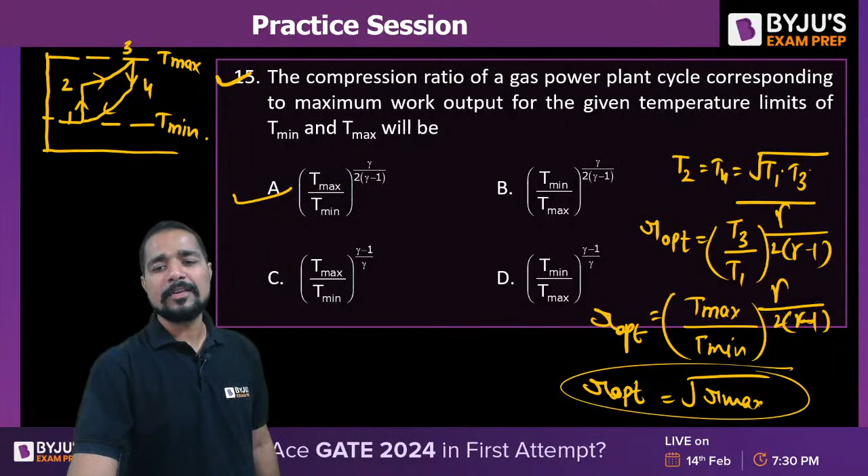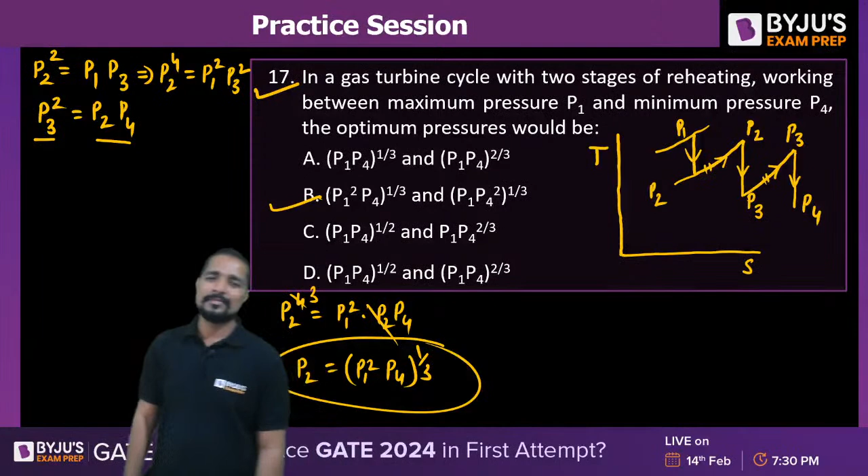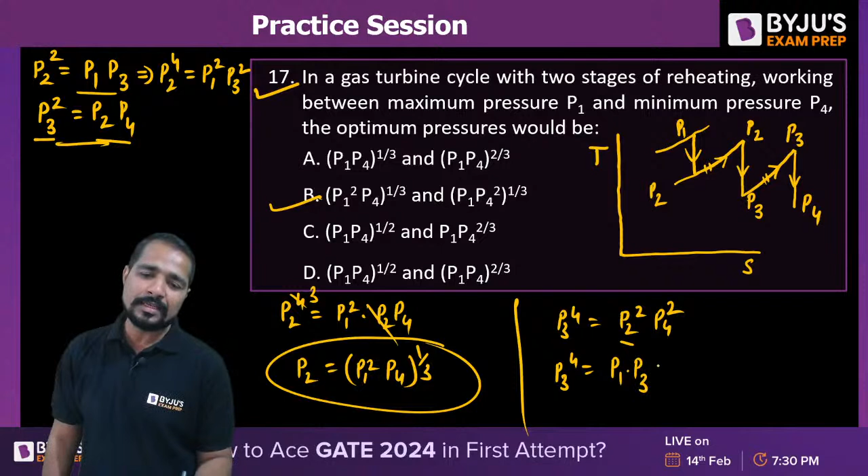Is it or not? Similarly, when you will solve this one, the answer will be P3 raised to 4 equals P2 square into P4 square. If I substitute the value of P2 square from here, P2 square is P1 into P3, into P4 square. When we solve it, this is the answer. Then from here we can write P3 equals P1 P4 square, raised to 1 by 3.

See, it was a two line answer, you just had to square it. And you get the correct answer in this case. So these type of simple problems, you all know, but you make mistakes in calculation. You know very well all the concepts, all the derivations we have discussed. But again, when it is twisted a little, we create problems ourselves, and then we get stuck in it. Okay? Let's move on.

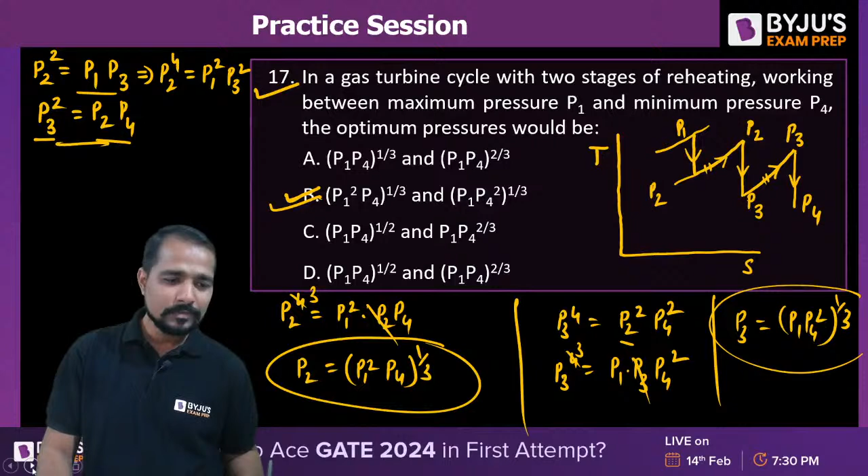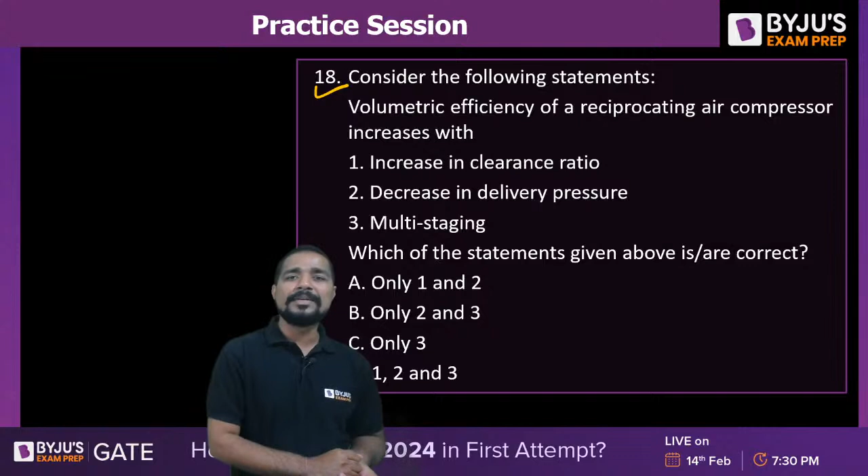Question number 18 we are going to discuss here. In the reciprocating air compressor, the volumetric efficiency increases with... very important concept. Very few of you are aware of the volumetric efficiency of reciprocating compressor.

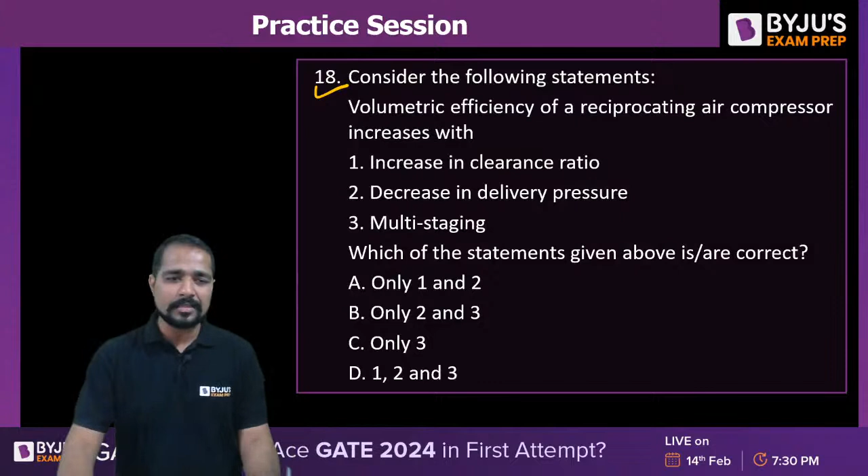First let me tell you the answer so it becomes easier for you to calculate. Volumetric efficiency means actual volume that is entering into the system divided by swept volume of the piston. It is also written as 1 minus epsilon into P2 divided by P1, where P2 is delivery pressure and P1 is suction pressure, raised to 1 by n minus 1. Tell me, this is the volumetric efficiency formula. This one is all about the volumetric efficiency formula. Whenever you need to find when volumetric efficiency will increase, it is not possible by this.

मैं वही टॉपिक ले रहा हूं जो हम इग्नोर कर देते हैं। ESE या PSU लिखने जा रहे हो तो वहीं से फोकस करके क्वेश्चन आते हैं जानबूझ के, अदरवाइज क्या कर सकता हूं मैं? मैं आपको स्टीम टरबाइन के क्वेश्चन दे दूंगा, H1 दिया है, H2 दिया है, Rankine cycle, IC engine efficiency, IC engine work done जैसे टॉपिक दूंगा। ये तो आपने गेट में अच्छे लेवल पे कर लिए होते हो, इन पोर्शन को हम पढ़े बिना नहीं जाते। क्वेश्चन बहुत आसान है।

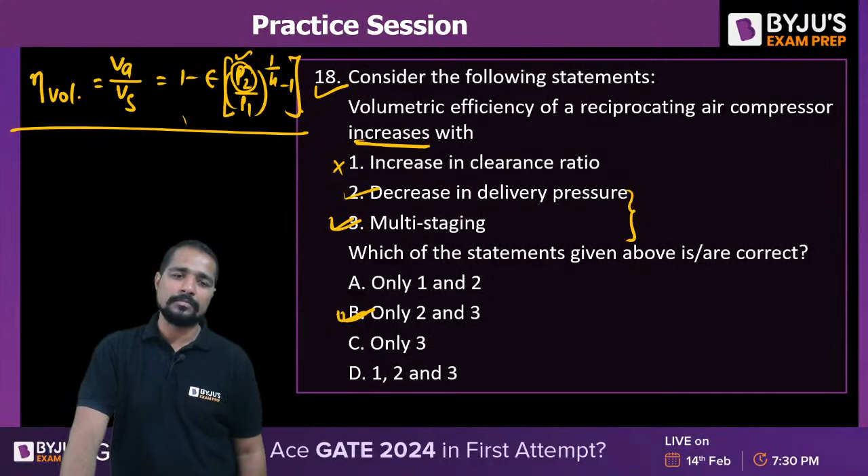So if the P2 will be decreased, then definitely efficiency will increase. And in multi-stage compressor, definitely efficiency also increases. What is the answer? 2B. Multi-stage compressor is nothing but you are controlling this P2 - आप इस P2 को ही कंट्रोल कर रहे हो। एक लिमिट से बाद में बढ़ने नहीं देते, उसके बाद दूसरा कंप्रेसर लगा देते हो। So yes, B is the right answer.

Next, चलो नया क्वेश्चन for you। If you say that why we are adding the psychrometric compressor process - in this part, my dear, we have added the next question that is purely related to the portion of psychrometry। चलिए अब बताइए।

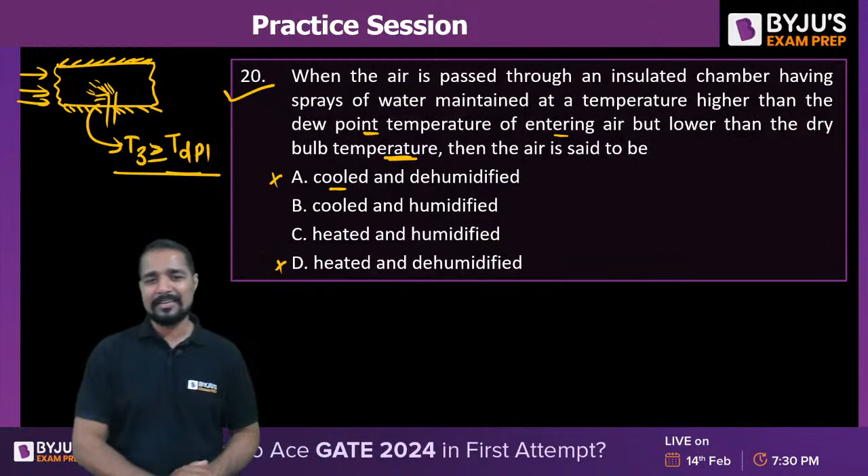So what will be the condition? Is it cooled and dehumidified? Not at all। सर वाटर स्प्रे हो रहा है तो dehumidify का कोई option ही नहीं आता, A and D will not be the answer। A और D तो हो ही नहीं सकते। डू यू नो heating कब होता है? यस दीपक, last question पे आए हो बिल्कुल। B is the correct answer। आप कह रहे हो C नहीं हो सकता, A नहीं हो सकता, B is the correct answer।

डू यू नो सर, when the spray water temperature is less than - दीपक हाउ वाज द पेपर ऑफ गेट एग्जाम, मिले नहीं उसके बाद, कैसा पेपर रहा? If T3 temperature is lower than the dry bulb temperature and more than the dew point temperature, then it is the example of cooling process, my dear। लेकिन अगर dew point से भी नीचे चला जाए तो water vapour जो already air में mix है, उसको separate करना start हो जाता है, यह condensation start होता है - that is the example of dehumidification। बट अगेन this is more than dew point temperature, that is the example of humidification and the cooling, my dear। So cooling and humidification is the answer। Heating and humidification is not the answer।